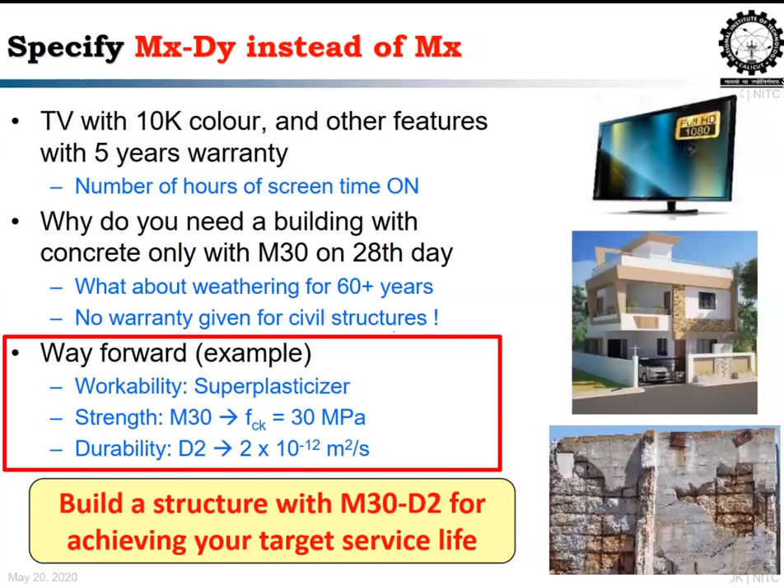And where the problem starts is, though we use quality material, quality testing, all the protocols, at the end it is executed mostly by illiterate laborers, where a lot of errors can happen. In my talk today, I'll be covering the major effects of poor cover, improper curing, improper mix designs. That is the major talk. So why do we need to be very, very serious about this?

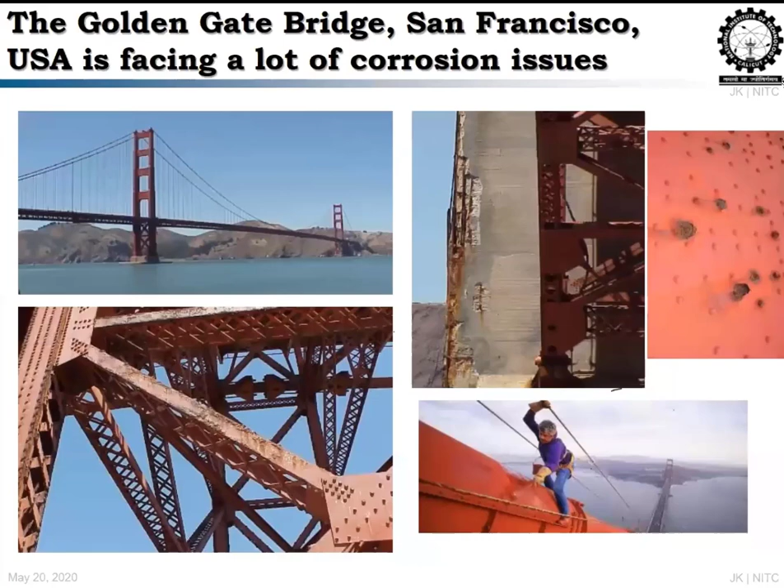For example, this is the Golden Gate Bridge. It's a steel bridge, not concrete, which keeps corroding throughout the year, and there is a team assigned that keeps cleaning throughout the year. They start at one end and finish at the other end by the end of it. This is a steel structure where the steel is exposed and we can see the corrosion. Even in the worst case, you can see where it is heavily corroded and repair it.

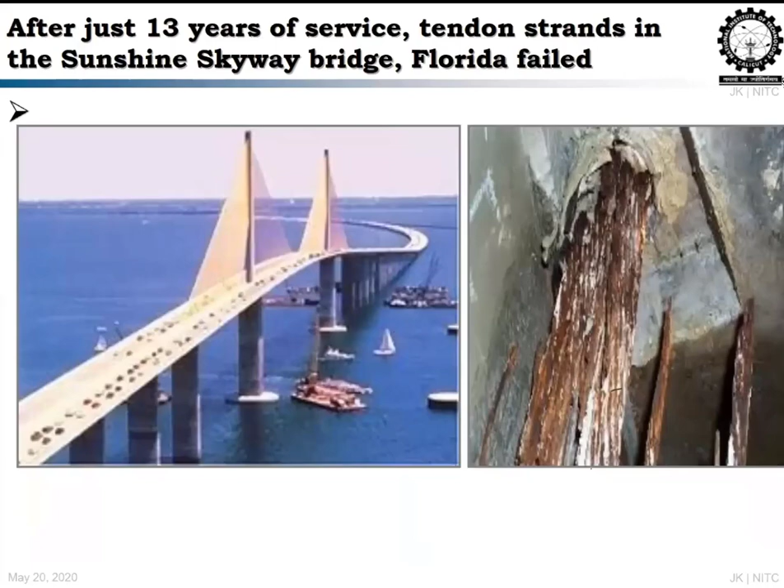The takeaway here is, in concrete buildings the corrosion is happening inside the concrete, which we cannot see. We can only see it through some physical changes that happen in the structure. So we should be very, very careful because we don't have a direct mechanism to capture the problem visibly. So what should be taken care of to ensure durability?

Of course, we have to protect the steel from corroding, because that is the major material that takes the tensile strength of the whole structure. So it's like a bone. If you don't have a bone in your body, you cannot stand straight.

Okay. So, if you have a person who is like a boxer, who is a global champion, but he has a serious cancer, if he will be dying within 2 years, then all his effort, all the trophies that he has won, the championship, everything will go away in 2 years. So like that, we should not leave the structure which you are constructing, which you are investing in.

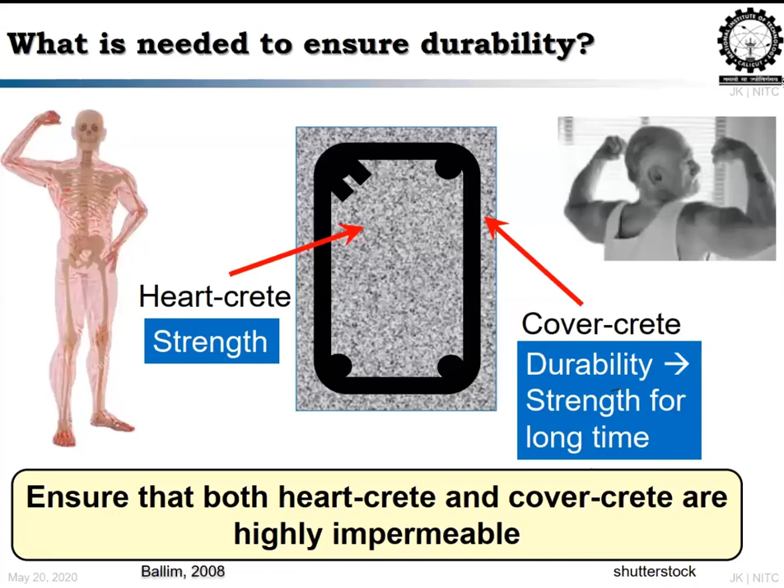So whoever builds a new home, they will have the experience of how curiously they select a material to build it. You will be going to many shops to pick what to put, what color, what kind of concrete. Everything will be picked. So that is the heart-crete which gives strength, but the cover should be protected so that you will have that building for a long time. So you should have a very strong and highly impermeable cover.

How to create it? That is the question. And before that, what are the factors that influence corrosion initiation, so that with our inputs the corrosion can be delayed or avoided? So we have three different parameters which influence it. The third one is the environmental parameter. It means where the building is going to be exposed, whether it is going to be at the seashore, in a city, or in a village. So there, what is the aggressive species that will affect the building? For example, if it is a seashore, it is going to be chloride.

Then the other parameter which we cannot change is the design parameter. That's the second one, where based on the code provisions, we should give the cover depth. Okay, so if it is given as 50 mm, you cannot go for 100 mm cover depth. There are a lot of practical issues. And also we should follow the guidelines for convincing our clients. So what is in our hand is what material we are using to design and execute the building to withstand the exposure condition. That is what is in our hand.

So the material which we use is obviously concrete and steel for making a concrete structure. For the corrosion to initiate, if you see the figure on the right side, there is a black round, that is a steel bar, which has a cover depth, where the red dots are the expected chloride if the building is exposed to the seashore. So slowly the chloride will penetrate and reach the steel to initiate the corrosion. So the movement of chloride to reach the steel is one of the phenomena where your quality of concrete is the influencing parameter. You should make a very good quality concrete.

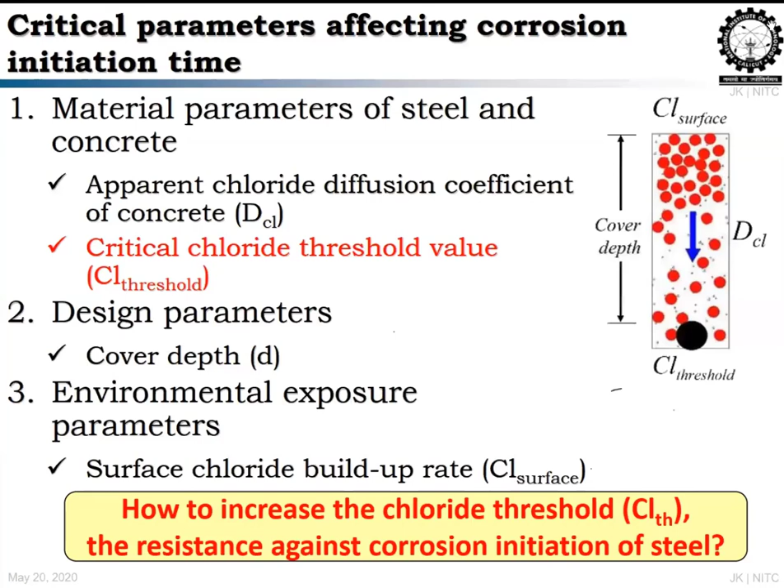Why does the steel corrode? Okay. Usually the concrete is rich in high pH, around 13 to 14, because of the presence of a lot of alkalis. So that is well known, it will have a high pH of 13 to 14. But how will it reduce, or why does the steel corrode? In the high pH, the steel will not corrode, that is well known again. It needs an acidic environment to initiate corrosion. We need at least a pH of less than 10 to initiate corrosion.

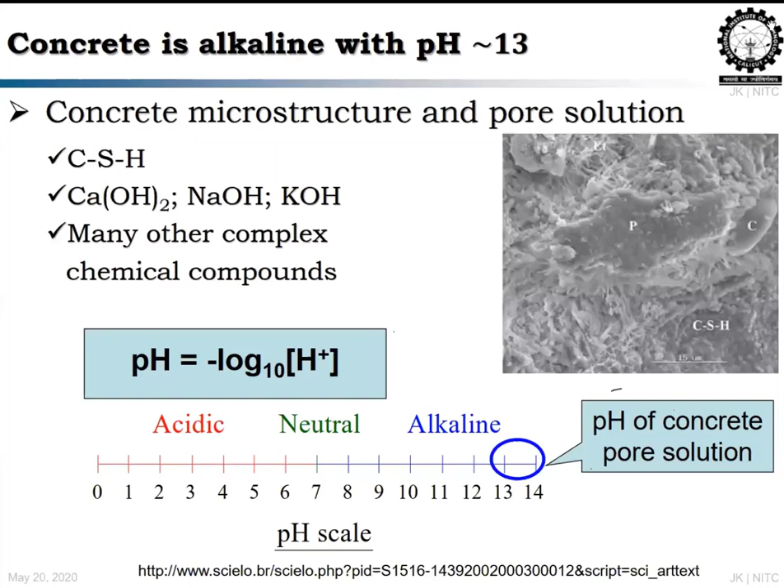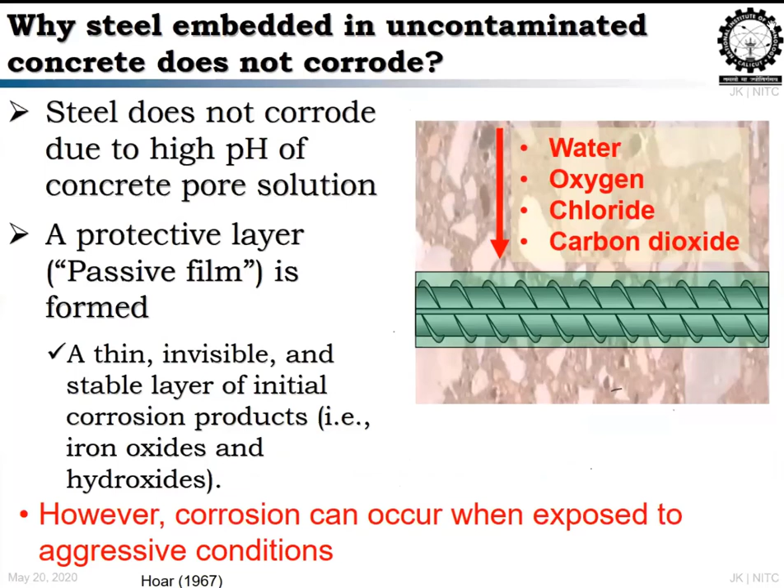Okay. But how is the environment favorable for the steel to corrode? Usually the steel will not corrode at high pH because of the passive layer on the steel surface, because of its formation during manufacturing and also because of the formation of a very thin layer of cementitious material. But how does the corrosion occur? Because of oxidation, which we call rusting, because of the presence of moisture, and beyond that, what are the other reasons?

Because of the chloride penetration and also carbon dioxide, which will collapse your concrete structure and it will create a lot of carbonic acid, which reduces the pH. So these are the major parameters which will initiate corrosion.

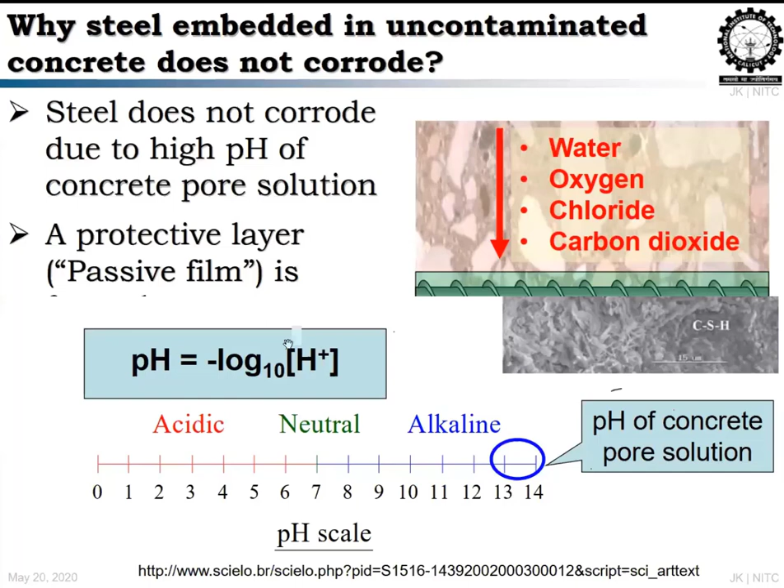So what are the other major corrosion mechanisms that will lead to the initiation of corrosion: freeze-thaw, alkali silica, delayed ettringite formation, sulfate attack, and many more we have in the list. But freeze-thaw in India is very rare, very close to the Himalayas. We have few problems, but it's not a major problem in India.

And we have very good aggregates where we don't have alkali-based aggregates, so we don't expect much alkali silica reaction. Okay, and delayed ettringite formation is a very rare case to happen. Most of the time our climate condition is not so favorable for it.

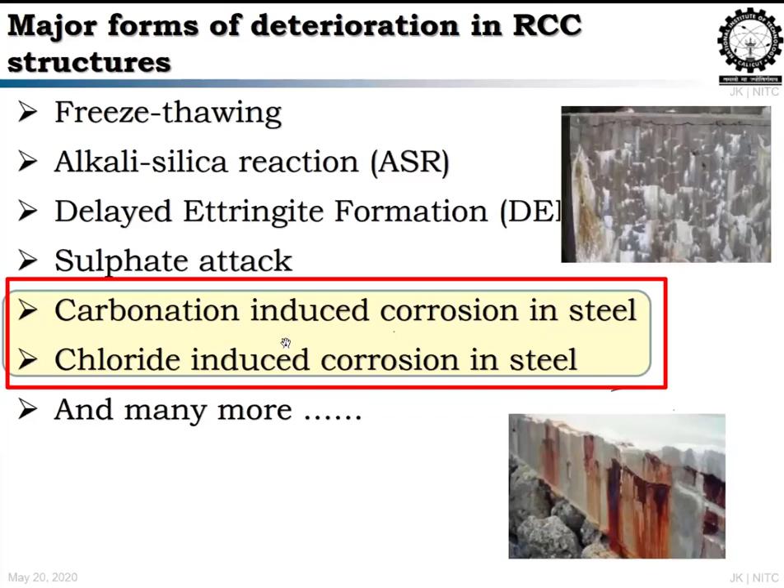Sulfate attack, obviously we don't have because of the very high quality cements that most of the companies are manufacturing, and also our soil conditions and water, whatever we are using, don't have much sulfate. The influencing parameters are chloride and carbonation, which are mainly from sources outside of the concrete, the external forces that create the corrosion. So these are the main two parameters.

What are the possibilities of this? Why do we have to put this as the main focus of the topic? Okay. So as we define the globe, which has three parts of water to one part of land. In India, it's almost three sides coastal, and the coastal zones have major cities, you can see Calcutta, Hyderabad, Chennai, Bangalore, Mumbai, even Pune, or most of the cities.

Most of the cities are near the seashore, where most of the buildings are exposed to quantities of pollution. Obviously, where you have very high traffic, you are expecting a lot of carbon dioxide in the air, which leads to carbonation. So it means India will be experiencing this, and a lot of studies have already been done saying that it should be taken as a very serious issue, so that you upcoming engineers should consider all these parameters I am discussing now and incorporate them in your future specifications.

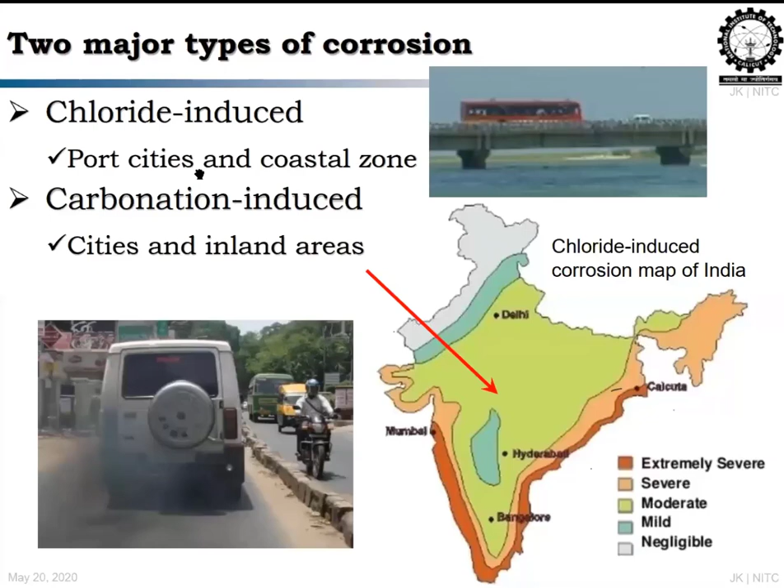And talking about specifications, we have a guideline from IS 456 which defines the exposure conditions: mild, moderate, severe, very severe, extreme. So mild, we know, doesn't have any weather issues associated with it. But severe means the concrete is completely immersed in seawater. And an extremely severe environment means the structure is exposed to very aggressive soils and chemicals.

But it doesn't tell how the deterioration mechanism works in a particular environment, and they didn't very clearly define what sort of changes should be made based on the deterioration mechanism expected in different environments. That is missing. That is what we should be very careful about. We cannot consider severe the same for all the cases.

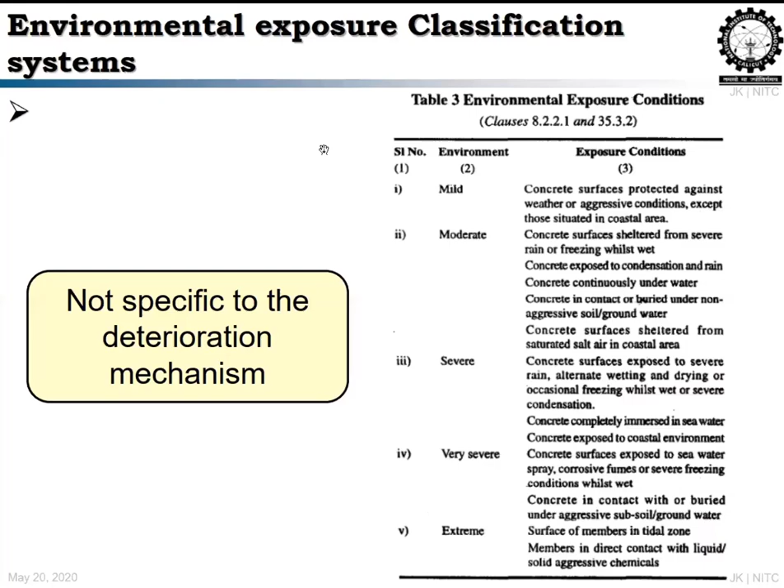Here they have given severe for concrete which is exposed to severe rain, alternate wetting and drying cycles, occasional freezing, and severe condensation. But there are many other parameters which will make the situation very severe. So we should change all those recommendations given in the codal provision.

If that is the case, how do we test carbonation and chloride, so that we can find where we are, whether the building we have is seriously affected or not? That we have to find. For that, whatever building you want to test, take a core of it and do a phenolphthalein indicator test, which you have done in your school days. It will tell you the depth of carbonation.

If the concrete is good quality, it will be very pink. Pink means it is good, like a pink baby, which is innocent. If it is colorless, that means it is carbonated. But the question is how the carbonation happens. That is the biggest question. We have a lot of carbon dioxide because of industrialization, heavy traffic, and many other parameters.

So what this carbon dioxide does is get into the pores of the concrete, and if moisture is present, it will create messy solid particles by reacting with calcium hydroxide or CSH, which is the strength-giving structure, and it will form carbonic acid, reduce the pH, and also form calcium carbonate.

Because of that, the CSH structure will collapse, and it will allow all other aggressive parameters to move. This is one serious issue.

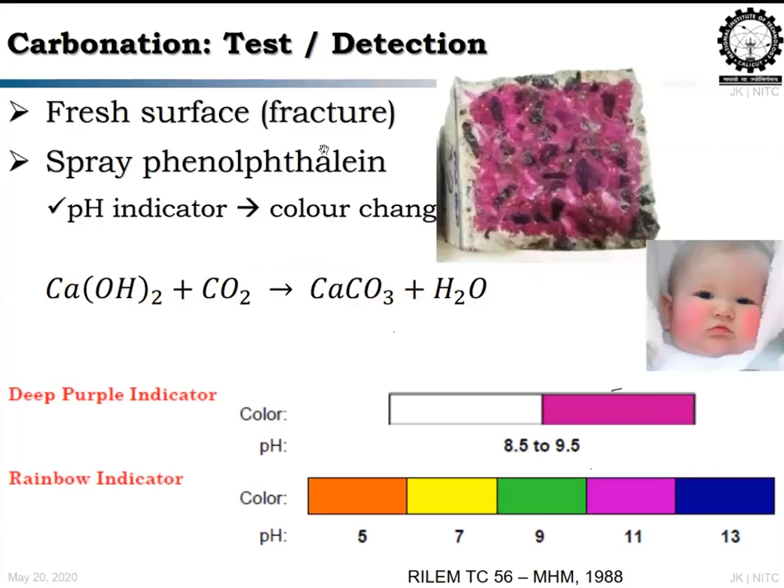If you are looking into corrosion of steel, there are different mechanisms. One is rusting, which is because of presence of oxygen and moisture, and the other one is chloride induced. With presence of oxygen and moisture, corrosion takes place as we see everywhere. We can see the rust on the steel, where it will form an anode and a cathode in the same steel bar, and it will take the moisture and water and form ferric oxide hydroxide. This is a very common reaction, and it creates a very uniform corrosion.

So the corrosion will happen throughout the steel structure, meaning throughout the steel bar. So loss of metal that happens throughout the length of the structure will be comparatively less. I'm not saying we don't need to bother, it's comparatively less.

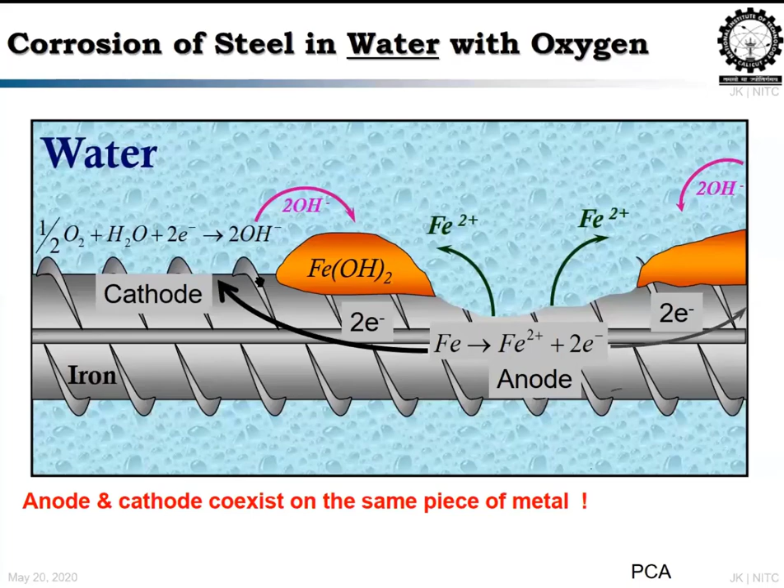Where we should be very serious is the chloride induced corrosion. Why? Because whatever Fe2 plus ions come out of corrosion, it will react with the chloride present near the steel surface, forming ferrous chloride, and that ferric chloride will react with the moisture and form ferrous hydroxide, the same compound formed in rusting.

In addition to that, it will form HCl, which we know is hydrochloric acid. Obviously, that acid will reduce the pH. Then, what is the major issue?

This HCl further, because of the reaction, will break into hydrogen ion causing hydrogen embrittlement, and again the chloride will be there. Again the same chloride will react with Fe2 plus ions and form ferrous chloride. This cycle keeps continuing throughout the life of a structure once corrosion is initiated. So we call it a regenerating process. We should be very careful about this chloride induced corrosion.

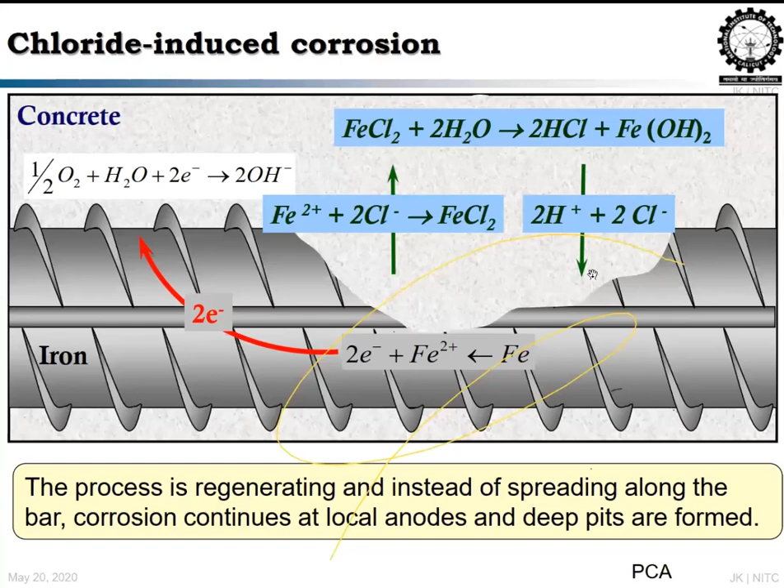It completely reduces the cross-sectional area of the steel, which cannot be detected by most of the NDT machines, whichever you use for finding cover depth, rebar locator, or profometer. Many instruments are available to see the diameter, depth of cover, everything, but they cannot capture this type of corrosion.

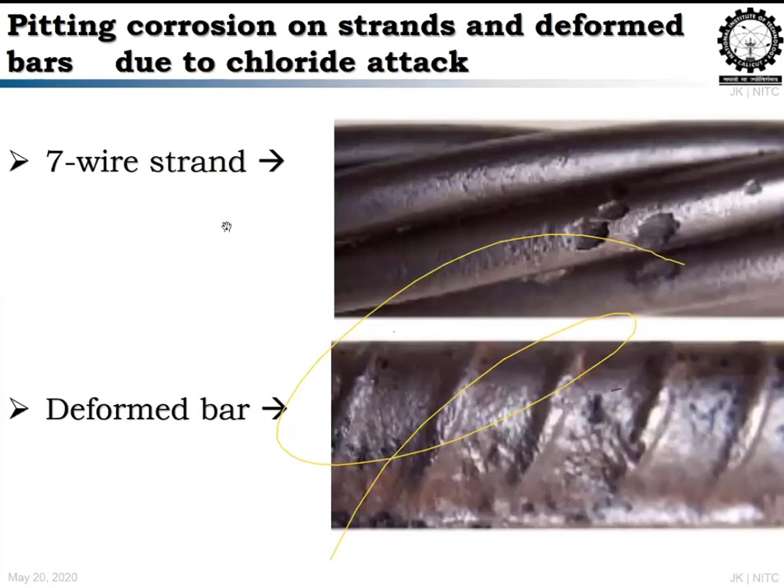You will think the building is of very good quality, but all of a sudden the building will collapse, which is catastrophic. You cannot realize how it happened. You will only see the corrosion after it collapses. So this is serious. And what happens if the corrosion happens?

Obviously it is going to increase its volume because it keeps oxidizing. It will form ferric hydroxide, and if you form Fe, it will form Fe2O3, and it keeps increasing its volume because of oxidation, which exerts a lot of tensile pressure on the concrete and induces a crack from inside.

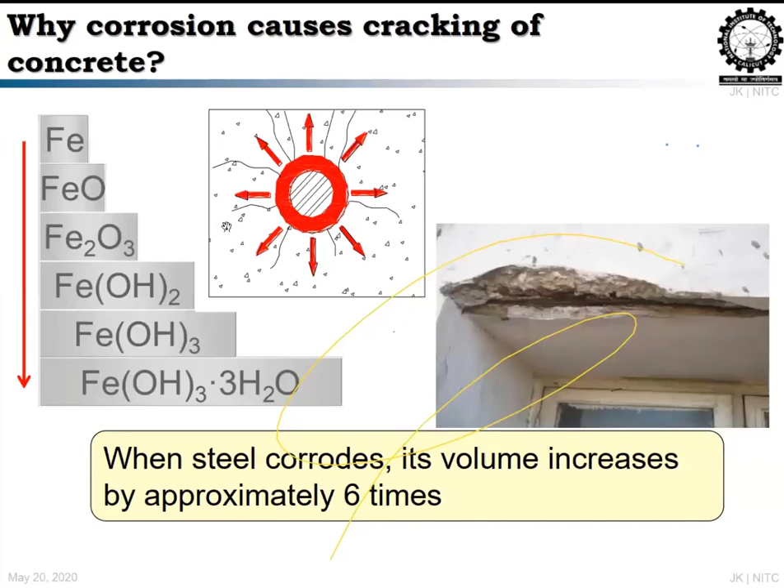We know concrete is always weak in tension, and the crack starts in a circumferential way because of the steel rust expansion, and that induces fine cracks, and all those fine cracks accumulate, allowing aggressive species to reach the steel. So again, we are inviting danger. That is the problem of allowing corrosion to happen.

How to choose the steel? Again, we are using TMT steel bars nowadays. But we know the steel bars have a microstructure of inner and outer regions, which we call pearlite and martensite.

The outer periphery area is of hardened metal, brought into structure because of quenching, which is part of the manufacturing process. That is a very hard one, and the inner part of the steel is a soft one—not exactly soft, but comparatively soft—which is more ductile, and that will be helpful for earthquake resistance and such. So we get a very good advantage.

Most manufacturers who supply steel don't completely form these two distinct layers because of an improper quenching process. This is something you can test wherever you want, no special equipment needed. You can see it with the naked eye.

All you need is 5% nitric acid added to ethanol. To get a closer view, I used a microscope. I'll show a video comparing how poor quality steel looks versus good quality steel. It's a very easy experiment anyone can do. I'll start by playing a video of bad quality steel.

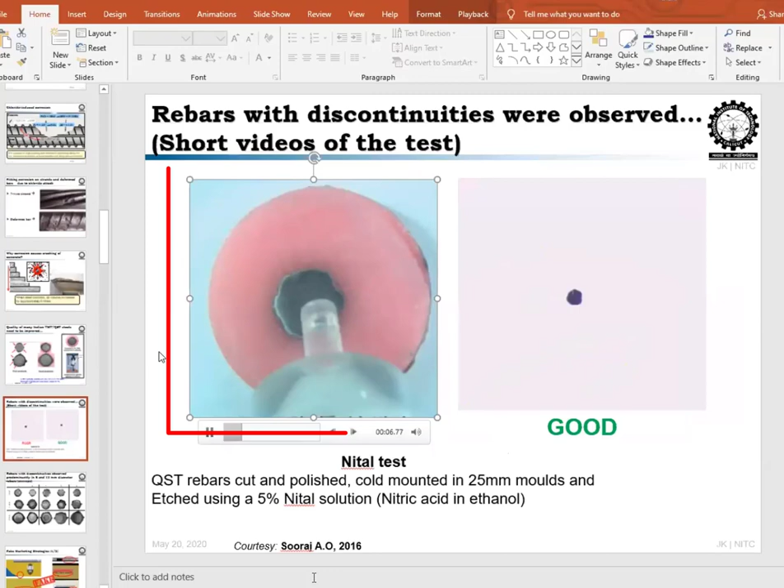The steel is polished well and exposed to the 5% Nital solution. As it reacts with the acid, you can see how an outer ring forms, showing a dark formation at the periphery of the steel bar. You can see it is not uniform all around the bar, meaning the quenching is not proper.

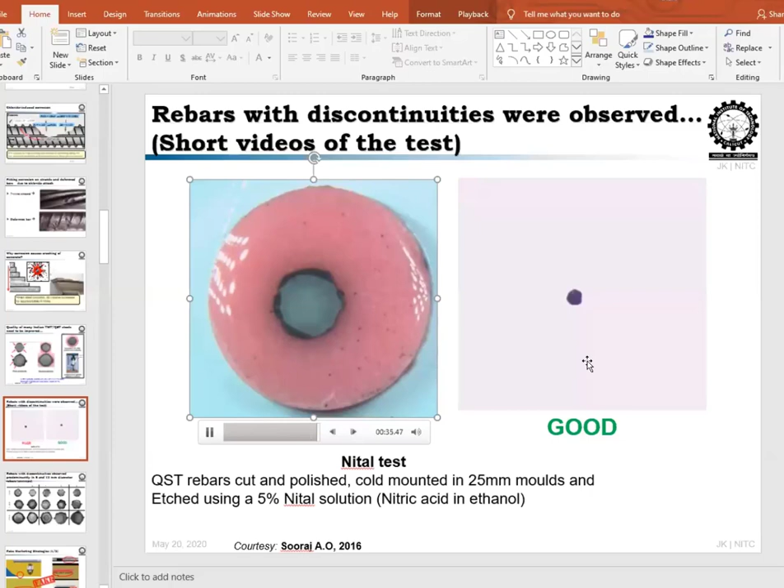Now let's see how good steel behaves. I'm playing this video for good quality steel, using the same process to assess the TMT bar quality, where the same solution is placed to see how the outer ring forms.

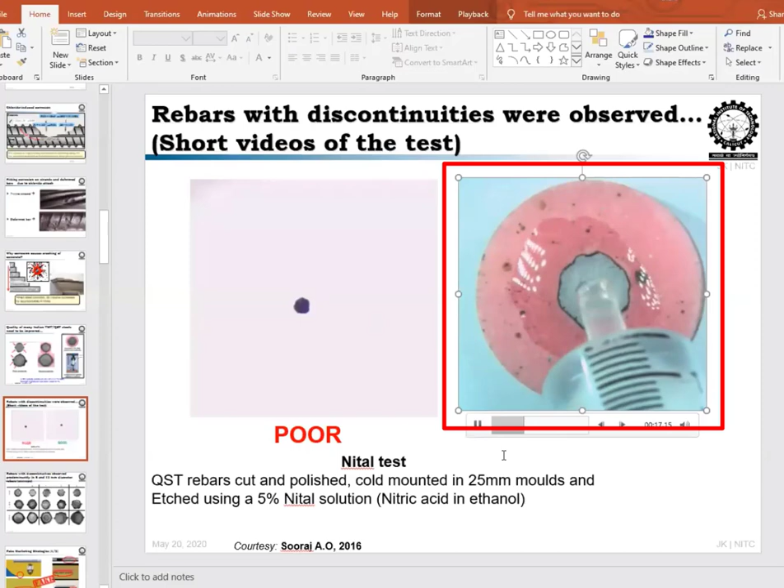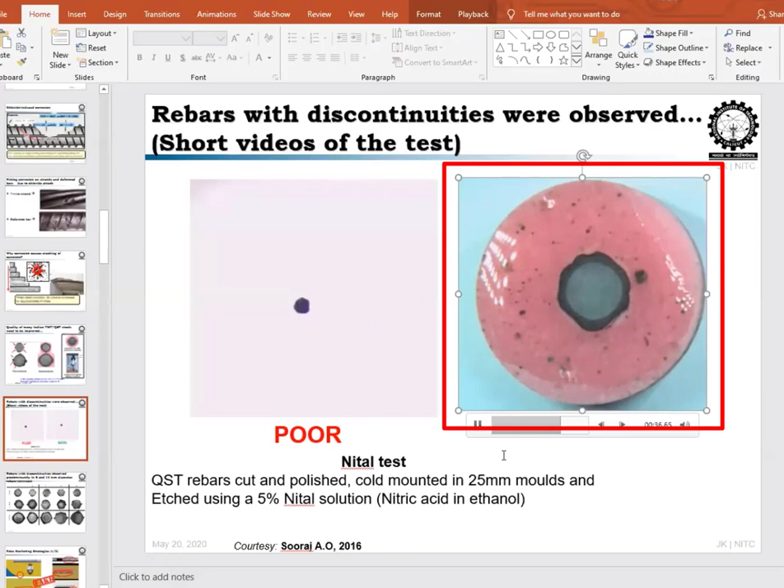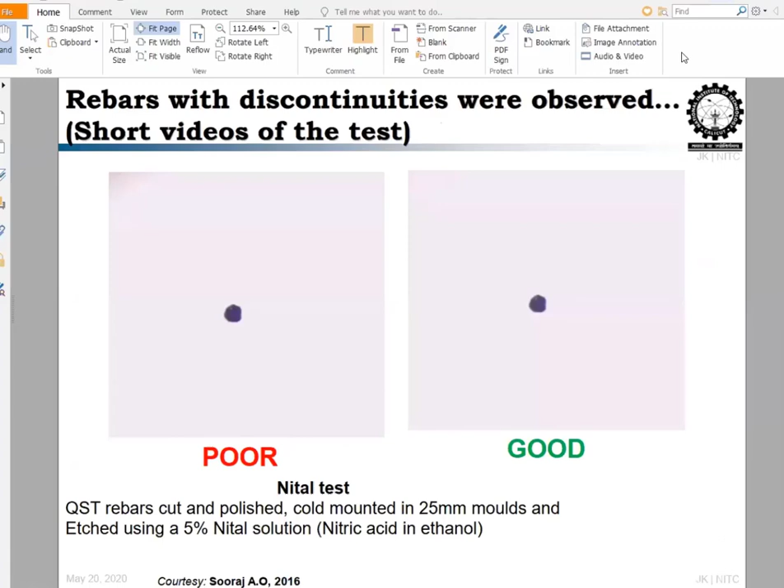You can see it forming, getting darker, very dark now. You can see the dark periphery at the end, and it is very uniform. If you compare both, it is very clear which is bad quality and which is good quality, as shown in this presentation.

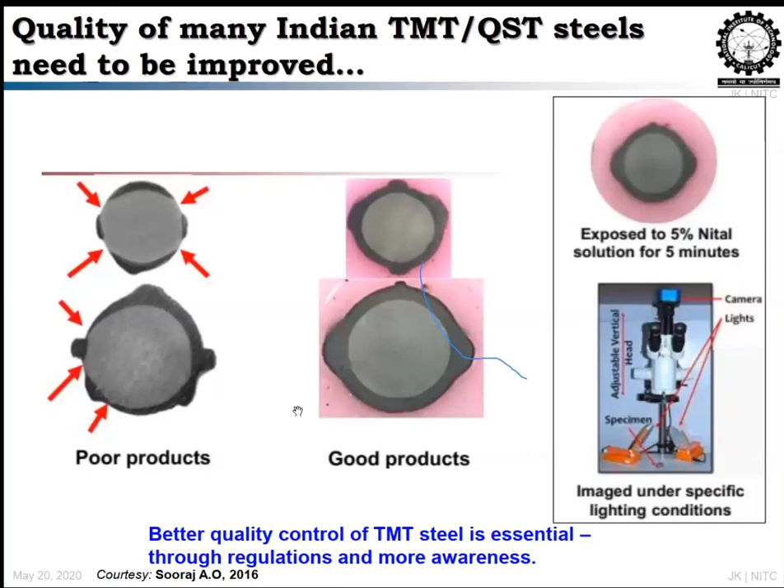The problem is, if there are two different steel compositions, it leads to dissimilar metal corrosion. You might have seen this at home with galvanized screws and nuts bolted into alloy plates, where the galvanized steel corrodes at the junction with the nuts due to dissimilar metal corrosion. The same thing happens in your structure, and dissimilar corrosion is faster than usual corrosion.

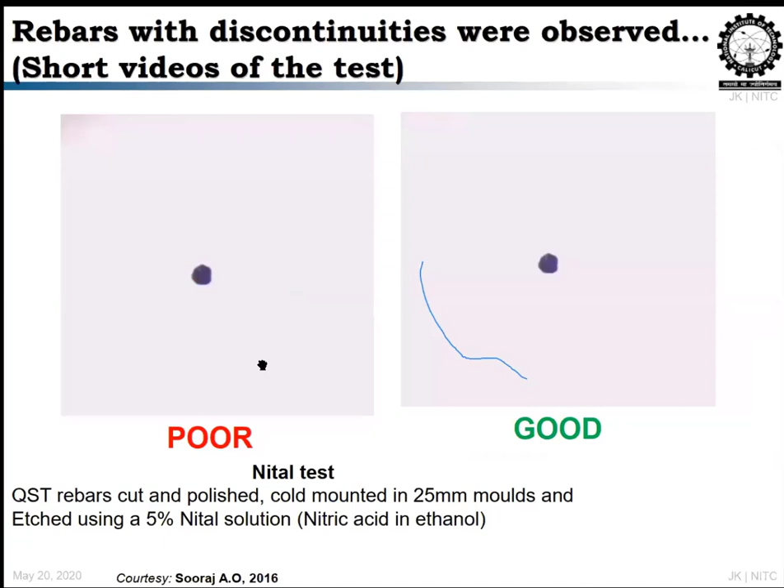This figure shows tests with many steel bars from different manufacturers and sizes: 8mm, 12mm, and 16mm. With larger diameter bars, the ring formation is very good. But with 8mm bars, in most cases there is no proper formation of the periphery, meaning there is no proper ring formation due to quenching.

What we need to take away is that in concrete, we consider the cover depth from the center of the main bar. What's projected outside is the stirrups, mostly 6mm or 8mm bars, which don't have proper formation of this ring. This means the stirrups are the main element that will get corroded.

If the stirrups get corroded, you will lose shear strength or face buckling. Buckling can happen in columns and beams where stirrups are lost, exposing you to shear failure or deflection at the beams. This is a very serious issue that we have to take care of.

While buying steel, or even as steel manufacturers, you should ensure you are supplying or buying very good quality. Another issue to look for is that many companies use marketing strategies to sell their product with catchy names, like 500 TMT bars or TMX 500 T bars. Most of the time, this 500 doesn't mean it is FE 500 like FE 400 - it's just a brand name, similar to i3, i5, i7 for computer processors. It's another model name used to catch customers.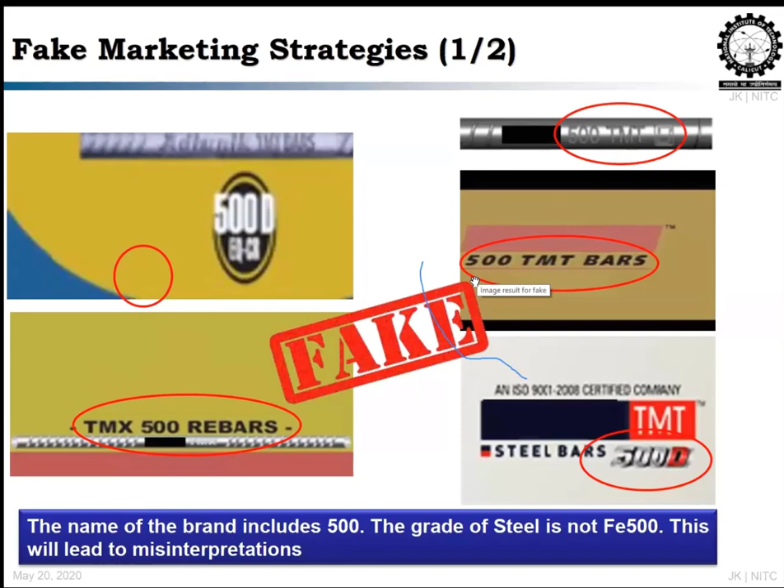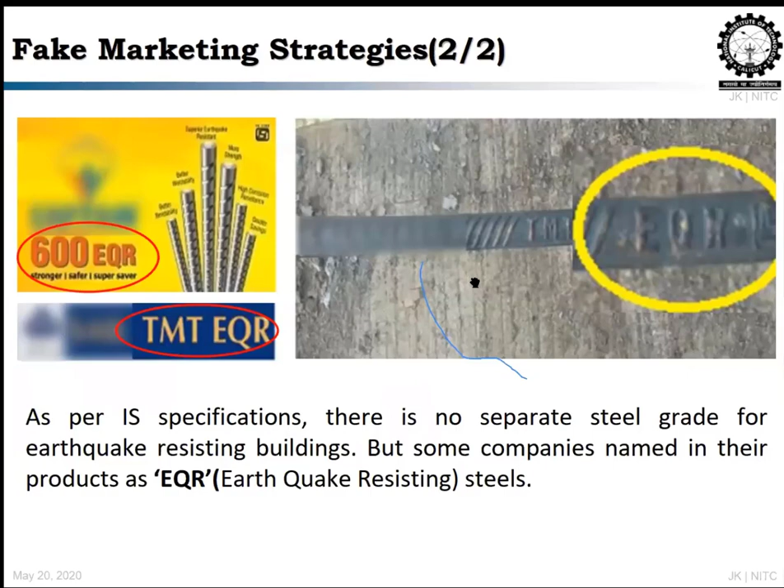You should be very careful. Some companies are selling EQR earthquake resistant steels, but there is no proper codal provision to define what earthquake resistant means, or a specification given for it. Many companies, with their own brand names, put labels like EQR 600 or 500 just to market their product. It doesn't really mean the steel is earthquake resistant, because earthquake resistance depends on the whole structure, not just the material, the design, how much steel is used, and many other parameters. So we should not run behind these catchy words. We should be aware, and also check that there is proper ISI certification on the board.

While buying material, always look for proper IS standardization, and make sure you have the genuine ISI license number. These are very important things to be keen about, because with the same grade like 500 or 600, everybody will start selling the same product name. That is very dangerous. You should not become a victim of that.

Even if you are buying good quality steel, how you store it is a major issue. IS 4082 gives clear recommendations on how to stack construction materials, not just steel but all materials and components. So here I'm listing how steel should be stored and how it is often stored nowadays.

Also try to keep the steel in a covered or closed environment, like a warehouse. That is the suggestion given by the Indian standard, and we should try following it. So these are about how to get steel and how to store it.

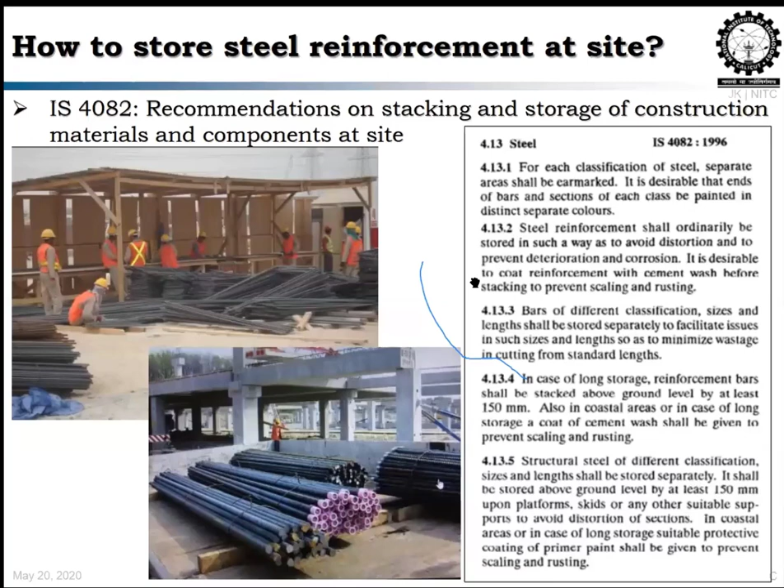But how do we stop corrosion? What parameters should we be thinking of? As I mentioned, if the quality of concrete is very bad, the aggressive ions will reach the steel and initiate corrosion. The level up to which steel resists corrosion is called the chloride threshold. That is the main parameter we have to determine.

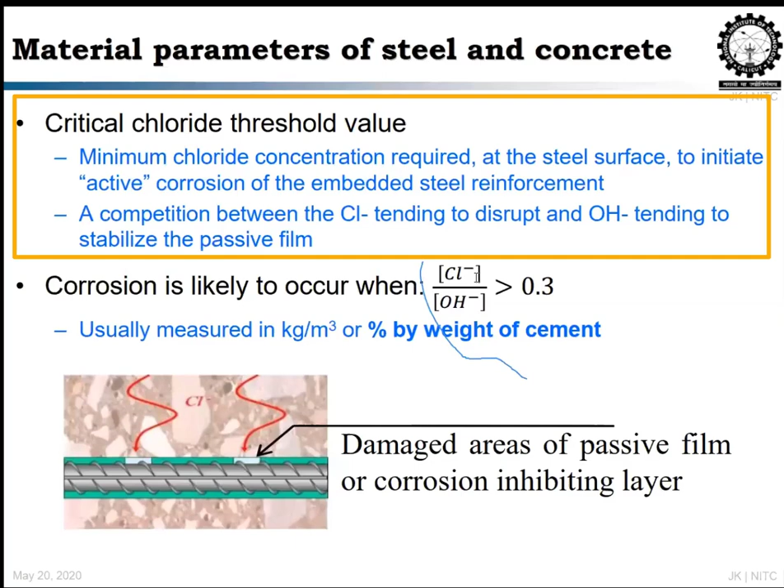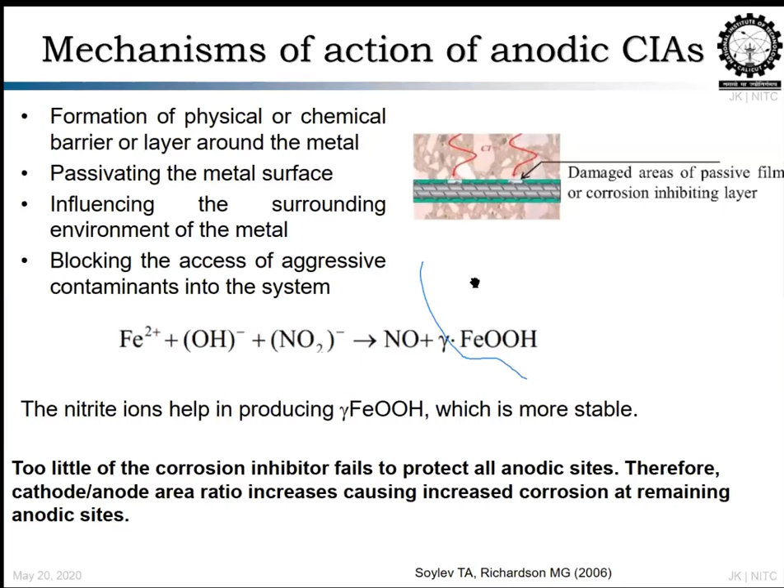So how can we increase resistance against corrosion? There are many technologies, like making good quality concrete. But I want to touch on a different area: using corrosion inhibitors, which form a very dense passive layer so the steel won't corrode. Even if the quality of concrete is not good, or you have restrictions getting materials or quality issues, using inhibitors will help you get good quality concrete performance.

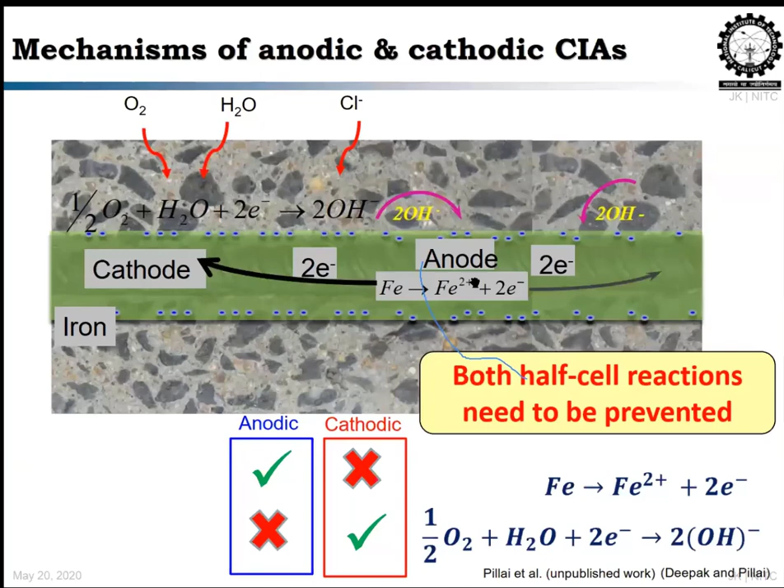There are different inhibitors available in the market. We call them anodic inhibitor, cathodic inhibitor, and the combination of both is called bipolar or mixed inhibitor. The anodic and cathodic inhibitors inhibit corrosion only at one end, either the cathode or anode, but reactions still happen at both points, tending to reach equilibrium for corrosion to occur. So these are not advised, though anodic inhibitors are still commonly used. What is advised is going for a bipolar inhibitor, available in the market nowadays, which inhibits at both anode and cathode through its different mechanism.

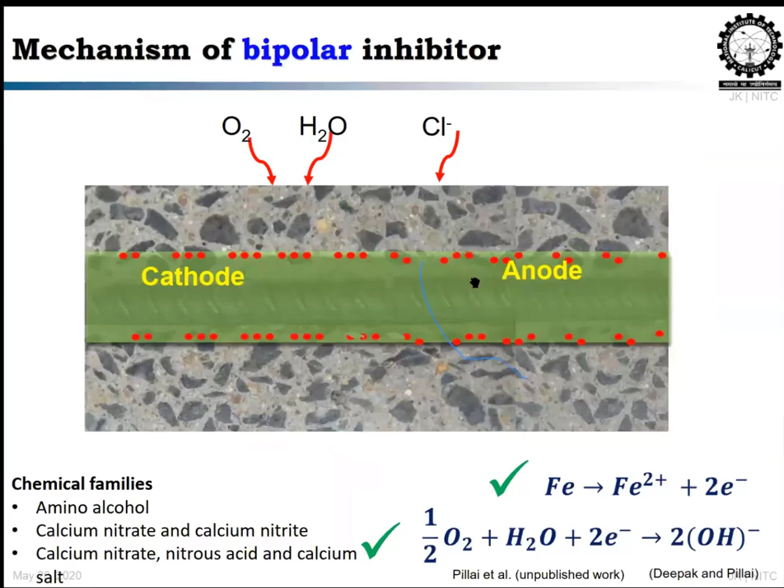I don't want to get too much into the inhibitors, but compared to anodic or cathodic inhibitors, these bipolar inhibitors are the best. We have results, and I will show you those, so you can realize how much better they are compared to the traditional methods.

We have test protocols and methods to test corrosion initiation and corrosion propagation with different mix proportions, different chloride levels, and different water cement ratios. Whatever parameter you are going to change at your site, we can recreate the same environment and test which environment is better, which inhibitor is better, or even if you are trying different steels from different manufacturers, we can find which manufacturer's steel is better for your requirement.

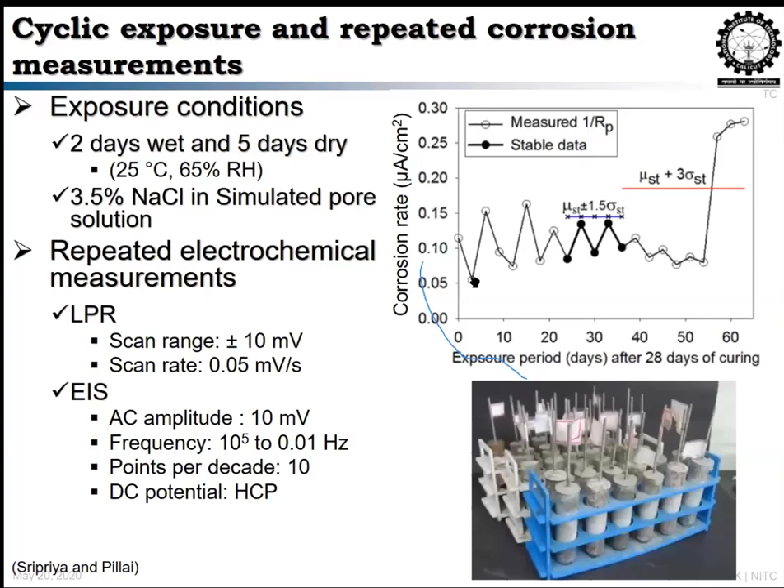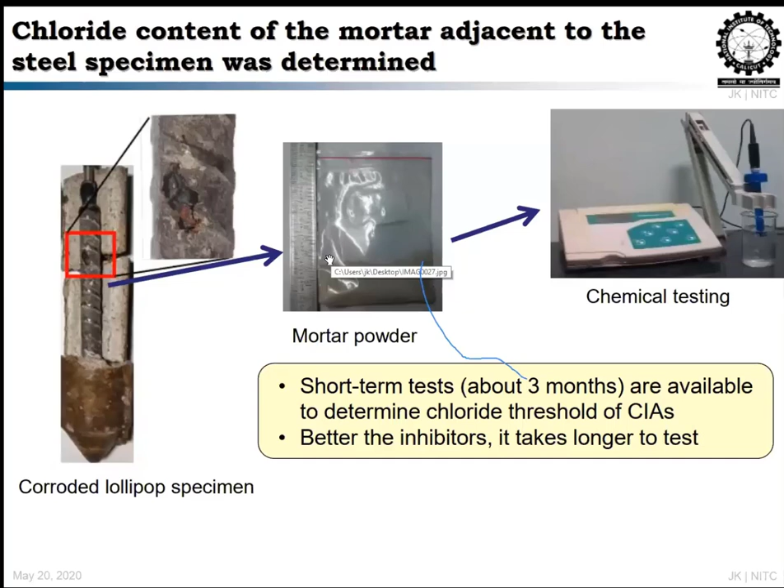So all those things you can find with the test procedure which is available. So here what we do is we will be exactly finding how much chloride is required at the steel surface. If you consider this specimen at the left corner, marked as a red box, where the corrosion has occurred, we will be collecting the mortar specimen and finding the chloride concentration. Okay. By this we will find what happened at the steel surface, which exactly replicates what will happen in your real structure. So that is the purpose of this testing.

So with that you can see I have compared the chloride resistance or threshold value between the cementitious system which doesn't have an inhibitor and which has a bipolar inhibitor. Without the inhibitor, the threshold value is around 1% by weight of cement. If you're going for bipolar, it is around 2% by weight. If you're going for an anodic inhibitor, it will be around 1. Means by using this bipolar inhibitor, you are getting double the corrosion resistance. That's what it means. Okay.

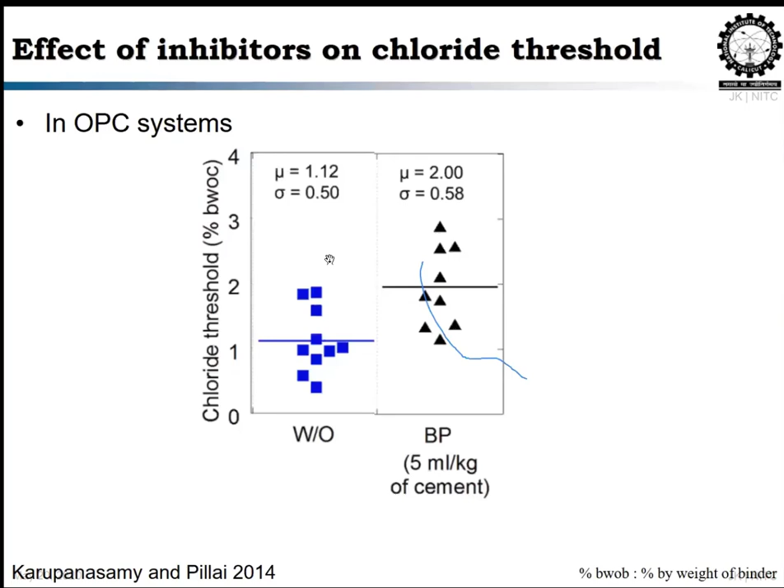So here you can see the chloride threshold level, which varies with the increase in the dosage of corrosion inhibitor. Okay. We have tried with OPC and PPC, where OPC doesn't have any inhibitor, and PPC we tried with 0%, 0.5 and 1% of inhibitor. And you can see with the increase in the dosage, you can increase the threshold. So that is one of the major advantages.

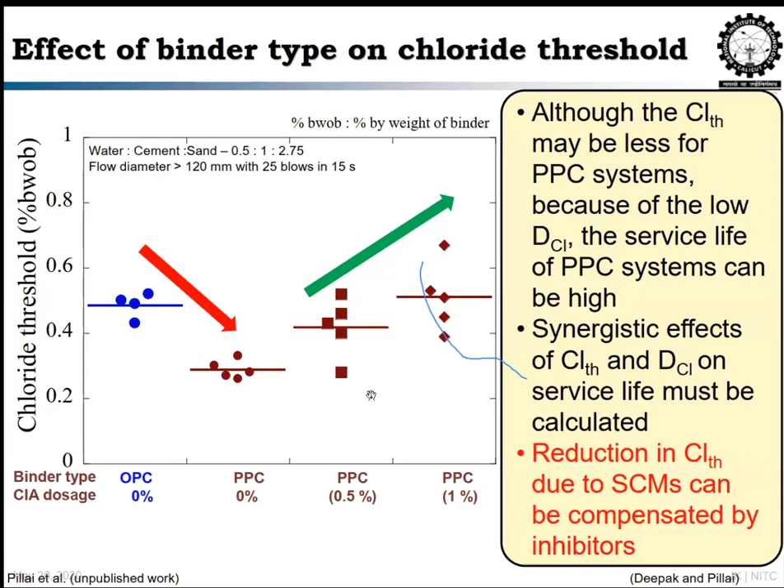So obviously we have to find what is the optimal dosage that is required against steel corrosion. That is very important. And we have to see what sort of PPC we have to use. That is also influencing. And also the water cement ratio plays a very important role in increasing the threshold level if you are going for bipolar inhibitors.

For example, we tried with 0.4 water cement ratio and 0.6 water cement ratio. With 0.4 we tried different dosages of inhibitor, 0, 0.5 and 1%, and with 0.6 we tried 0 and 1%. With 0.4 water cement ratio, with the increase in dosage, you can see the increase in the threshold level. But with the water cement ratio of 0.6, with the increase in dosage, you couldn't get the expected threshold level. Why? Because these admixtures are diluted and lose their efficiency. Okay, so that is the major problem.

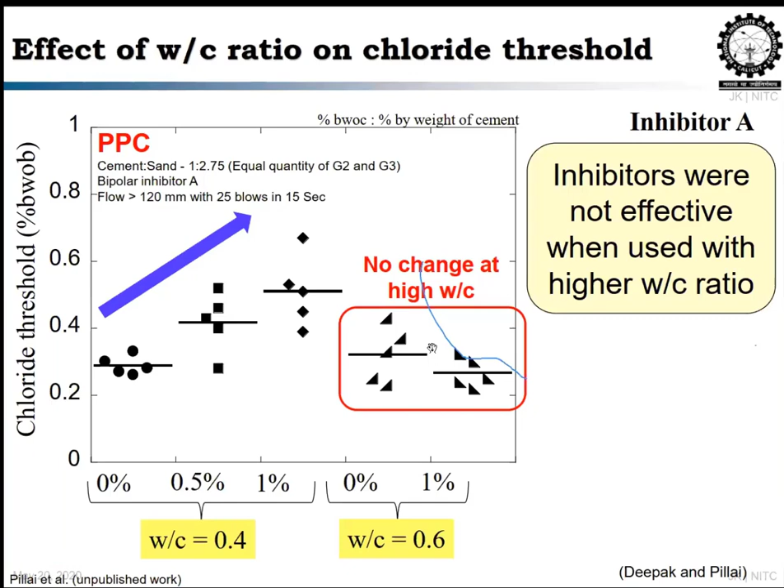So it is always recommended to go below 0.5 water cement ratio if you are using any inhibitor, not only bipolar or anodic inhibitors, any inhibitor. It's always better to go with 0.5 water cement ratio, and you can get your slump with your plasticizers. You can play with that. And compressive strength is also affected, not only the threshold level, if you are not properly choosing your dosage.

Okay? So here it is a bipolar inhibitor, where the manufacturer has given a recommended dosage for a particular cement content, which we have followed, mentioned as RD, the recommended dose. The boxes on the left of RD are dosages less than recommended, -20 and -40, and those on the right are +20 and +40 of the recommended. With no inhibitor, at the left end, the strength is around 35 to 40, and with the recommended dosage we again get almost similar strength. But if you reduce or increase the dosage, you get less strength. So choosing a dosage to achieve appropriate strength and durability is the concern.

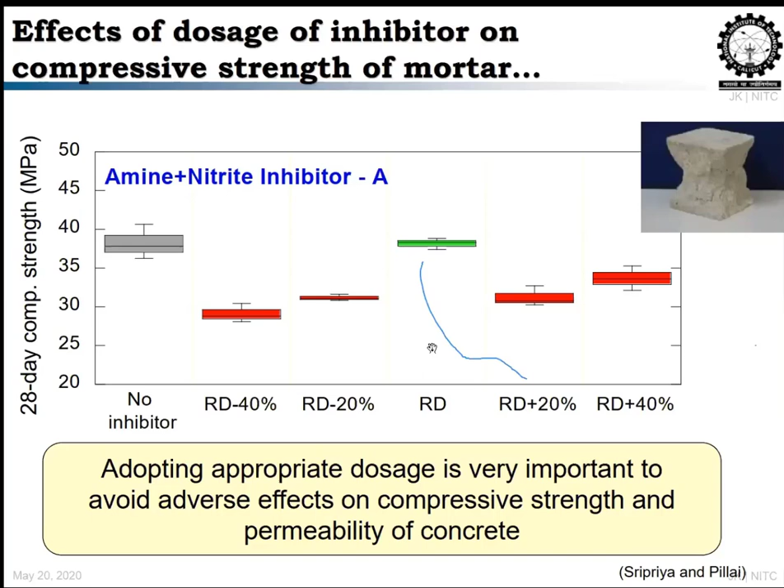Okay. So why is this happening? Because of not properly maintaining the water cement ratio. So again it creates a problem and it leads to permeability. So dosage is also an important parameter.

Another problem that we face is how to find whether the inhibitor was used by the builder while making the concrete. For example, if you use a superplasticizer, the performance will be seen immediately while concreting. But the performance of the inhibitor you will see only after a few decades, after 20 years, which is not at all visible. Okay, so we don't have proper techniques.

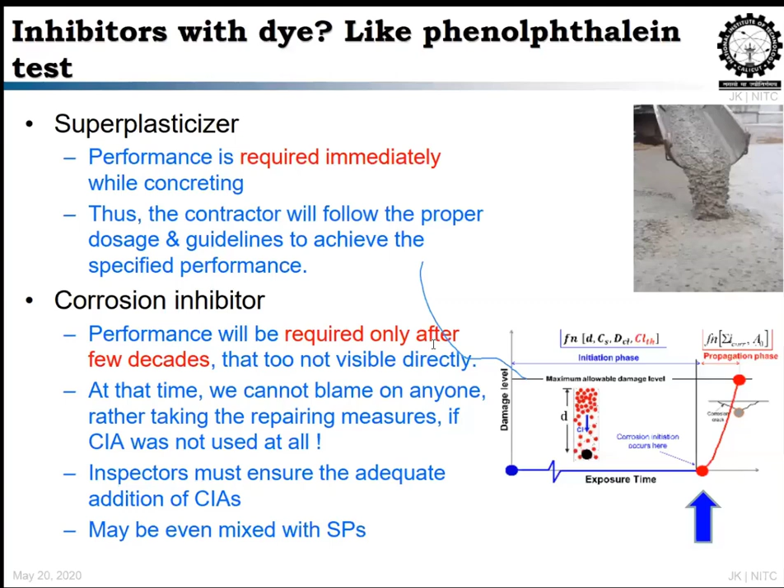So those who are researchers or enthusiasts who like to work on chemistry or non-destructive techniques, we are expecting some test method like how we do for carbonation, where just by simply spraying you will know the depth of carbonation. Just by spraying on the concrete, maybe chipped off or patched, if you can get some color when you have a corrosion inhibitor. This is a question for the participants, so you can look into it. This is the open option which is given. It's like a challenge for us.

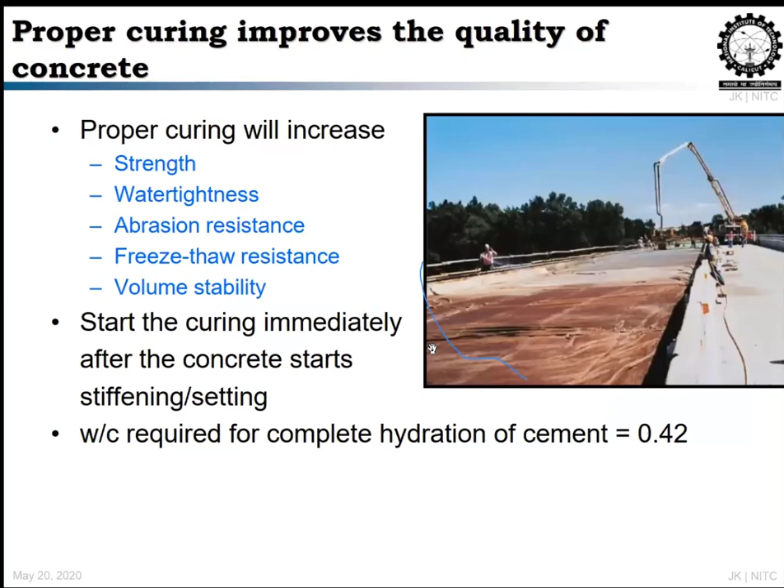And even if you have good quality concrete and concreting is done, curing is very important. Obviously it will give strength, water tightness, abrasion and freeze-thaw resistance, and volume stability. But how long we have to cure, and how to see the influence of proper curing? So you see a graph which shows the compressive strength with respect to age. There we have taken 4 cases, where the light brown color is the case cured at the laboratory, not with water, only with air. We didn't expose it to any ponding or moist curing.

The second case, in green, is 7-day moist cured, as we do, or ponding, and then exposed to air for 1 year. The third case, in red, is cured for 28 days and exposed to air for 1 year. And the fourth case, the dark blue line, is moist cured throughout the entire time of exposure. So here, the case where it is not properly cured, meaning air cured, gives less than 30 MPa at 90 days, which looks similar to the 28th day. There is not much difference.

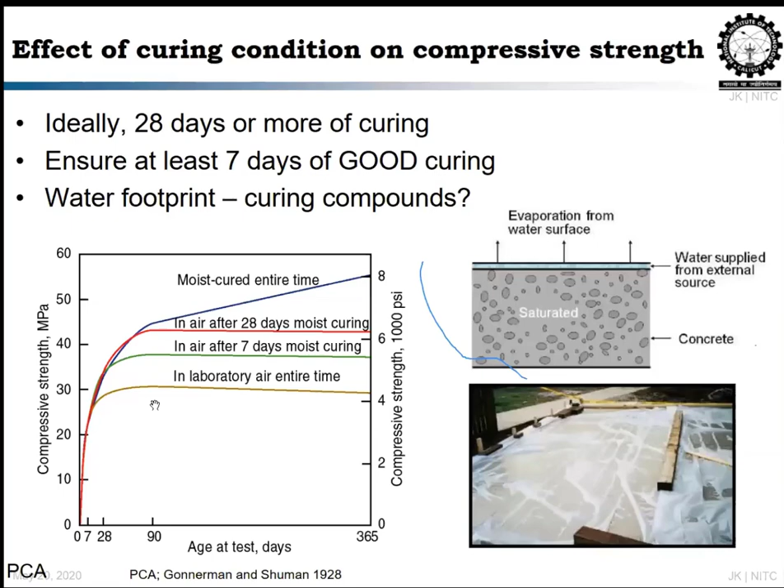But if you see the variation in strength after almost 60 days, you can see a major difference in the strength. So what is emphasized is at least cure for 7 days, and if you are using any secondary cementitious materials or fly ash, make sure you cure for 28 days or more if possible, so that you get a very high strength, rather than putting a lot of OPC thinking that OPC will give you strength. It will give you strength obviously, but you can save money just by using fly ash and proper curing. So that is a very important takeaway.

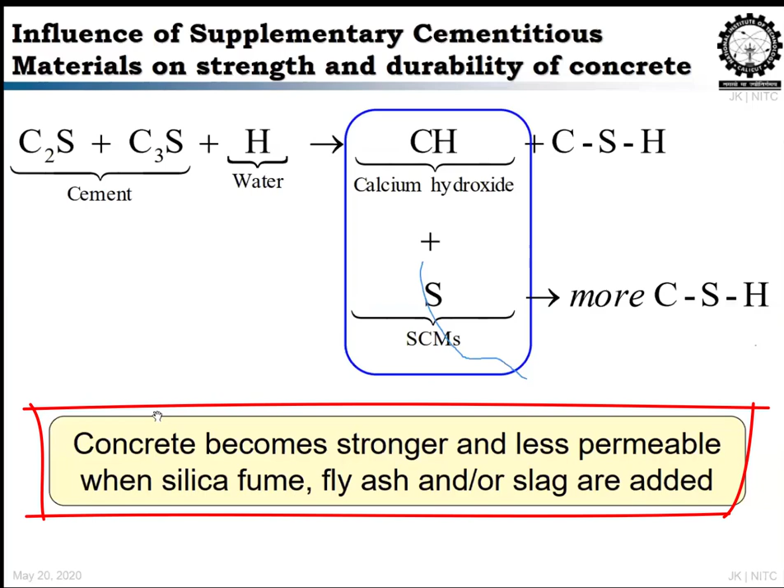And how is this strength achieved just by curing? These secondary cementitious materials, which are rich in silica, take up the free calcium hydroxide in your cementitious system, which forms when cement hydrates by reacting with water, and that forms more CSH. CSH is calcium silicate hydrate, the strength-giving compound which makes the concrete very impermeable. So if you have double the CSH, you get an increase in strength and a very impermeable layer. So secondary cementitious materials like silica fume, slag, and fly ash are recommended. We'll see how it influences your durability.

So here we are looking at the diffusion coefficient of concrete with different water-cement ratios. Just by making proper proportioning based on the water-cement ratio, you can achieve a very good reduction in your diffusion coefficient. The diffusion coefficient is the rate at which aggressive agents like chlorides move from the cover to the steel surface, the rate of movement of aggressive ions, simply. So you can see from 0.3 to 0.6, comparing 0.3, 0.4, 0.5, it changes by one order. So it is always recommended to go for a lower water-cement ratio to have a reduced diffusion coefficient. The main parameter is to have a very low water-cement ratio.

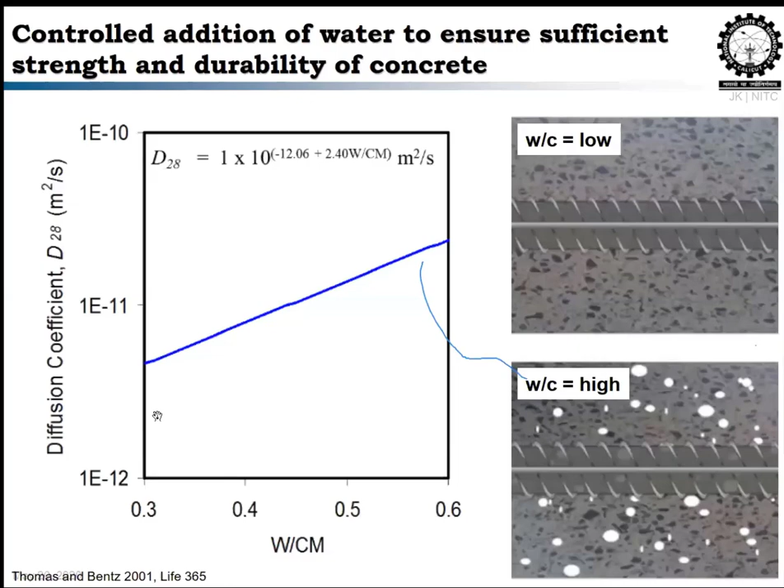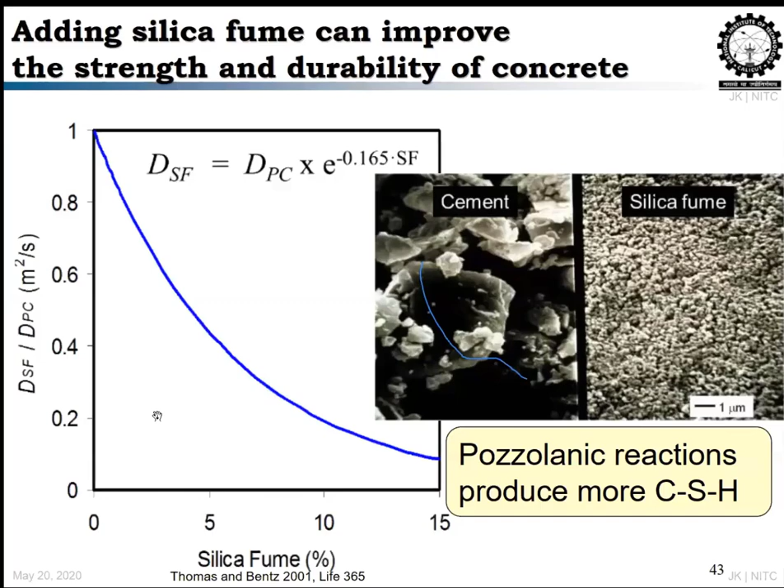And again, let's see the impact of silica fume. Comparing the diffusion coefficient of silica fume concrete with Portland cement concrete, that ratio is given on the y-axis against the percentage of silica fume used. With no silica fume, 0%, we take the ratio as 1. Going to almost 10% is more than enough to reduce your diffusion ratio to 0.2. So that is a major impact you can see just by using silica fume. This is another parameter showing the importance of using secondary cementitious materials. And then the importance of having different.

So you will be having a question, which one I can pick for my requirement. So for that case, this graph shows age in years for the range of 28 days, 1 year, 10 years and 100 years. And it shows the diffusion coefficient, and also you can see it is marked as 28 days, where it is almost 0.1 year, where if you see the diffusion coefficient is almost similar. If you are checking on 28 days of a concrete, it is almost similar.

You will tell that there is no effect of using secondary cementitious material. Why we have to use fly ash, why we have to use slag, or why we have to use some other cementitious material. But if you see, with the increase in age, with 40% use of fly ash, it is changing the diffusion coefficient by almost one order, when comparing to the case which is in blue color, that is the Portland cement, which is nowhere comparable. That's why it is very, very important to use the secondary cementitious material.

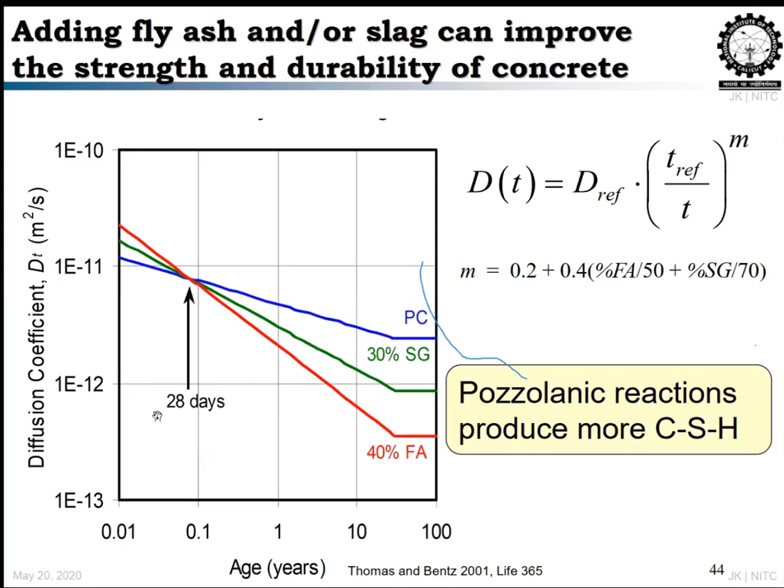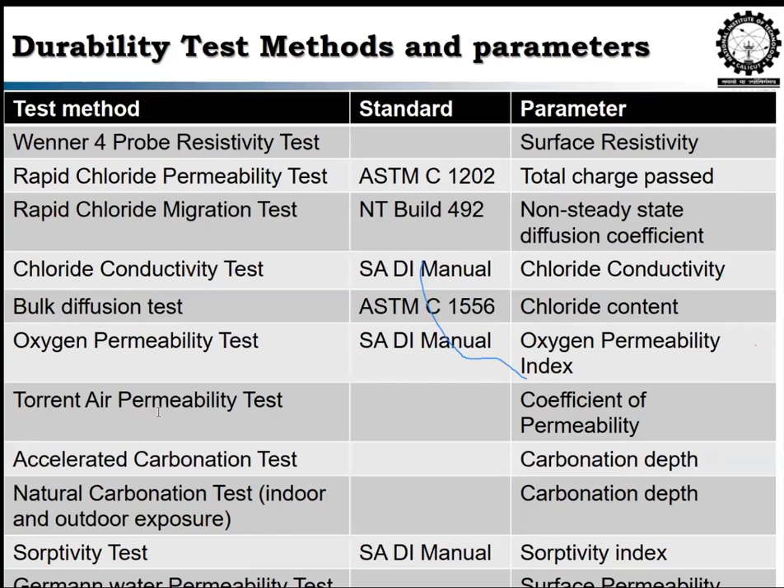And to test this, n number of different types of test methods are available. I'm not getting into all this. Just I'm showing you so that you can take a screenshot of this, or I think it may be recorded so that you can get the video and you can do all the tests to get the different influencing parameters. Just like how I showed for diffusion coefficient, you can find all other influencing parameters which lead the corrosion to happen. And we'll get into the service life part.

We got diffusion coefficient. I'm talking about threshold level. So how to use it, how we can find, if I know this number, how many years my structure will perform. That is the main content of today's talk. So here, as I told, as the time goes on with the increase in the exposure time, the chloride ions, which are shown in red color, will move towards the steel bar, which is shown as a black circle, and it will initiate the corrosion. So that phase is called the initiation phase of a service life.

Once the corrosion is initiated, it will start propagating. It means the corrosion will happen, and you can see the rust stains and the cracks that appear on the concrete. So our main objective is to stop the corrosion initiation. That is the easiest way, rather than initiating, corroding, and then stopping in the propagation. It will take a lot of money from your pocket to repair. So we estimate this initiation phase with the durability parameters that we have seen, using threshold and diffusion coefficient.

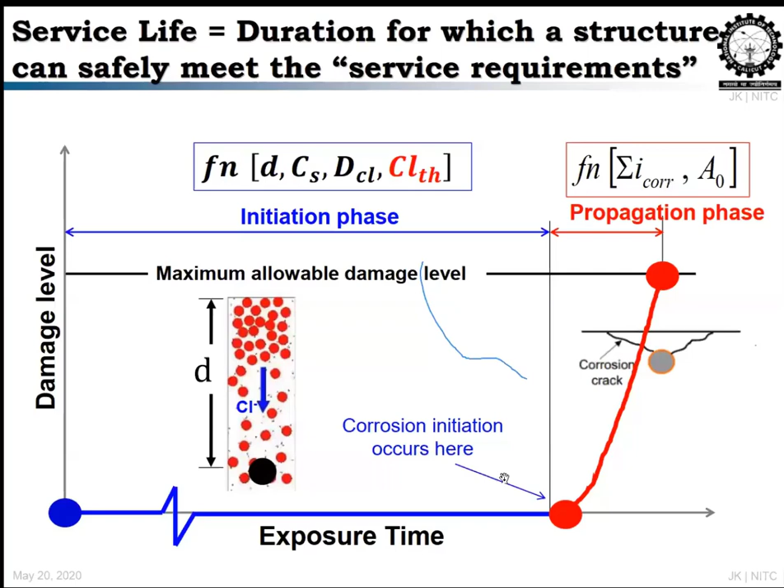For that, I will be showing this software in many places. It is free software which you can download free of cost from life-365.org. With this software, the advantage is you can try different water cement ratios, different inhibitors, different steel, different mix proportions, and different exposure conditions. It is developed by world leading chemical admixture manufacturers, and even ACI is a part of it. It is developed based on standards by ACI, that is ACI 365. So it is a little bit reliable, but not completely a one-point source for everything.

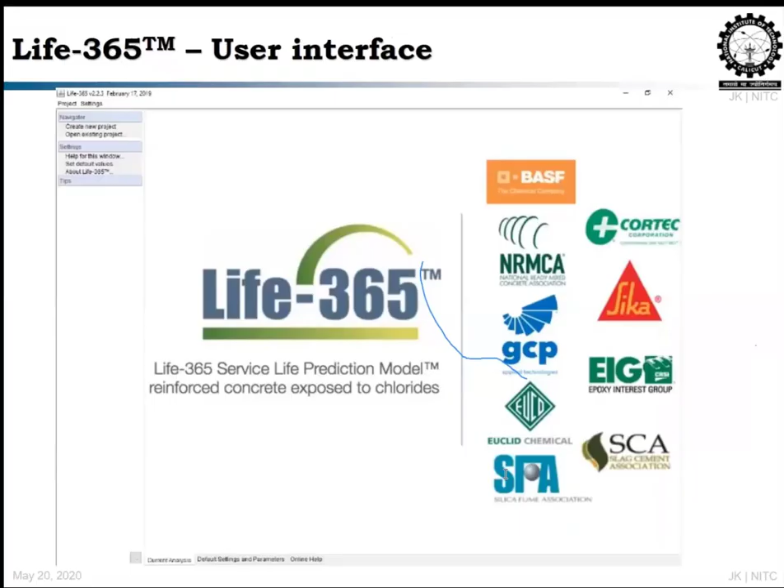So here I'll be walking through the software just by taking a few cases where, for example, a bridge is on a seashore, which has 50 mm cover, with conventional TMT rebar, where the variability is water cement ratio of 0.4 and 0.6. And it has different secondary cementitious materials, 15% silica fume and 15% fly ash, and combinations without it. So these are the combinations. I'll do a quick walkthrough of the software.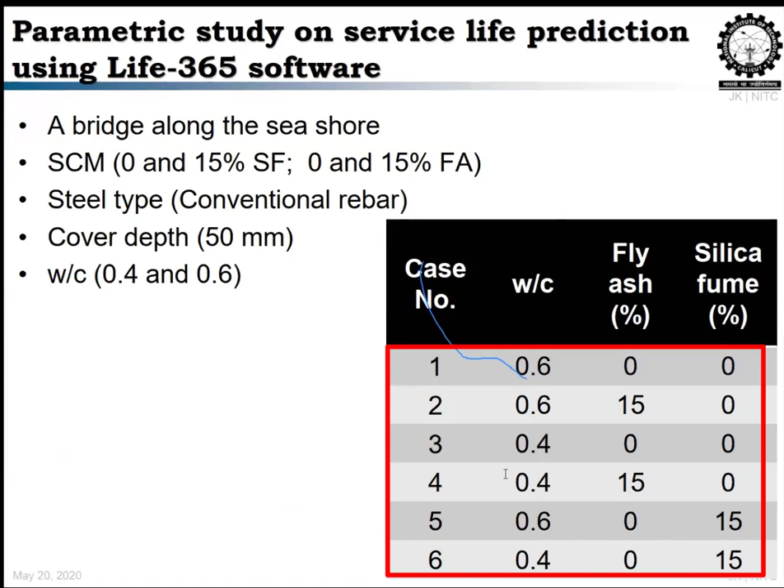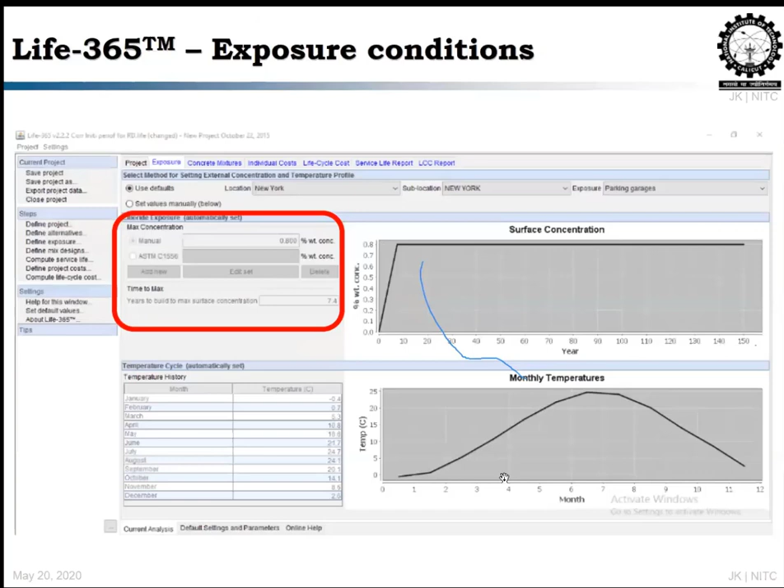The software interface, where you can define the depth of your reinforcement and what type of structure it is. This is more than enough. And where the structure is exposed, what temperature is faced in the particular place, what is the humidity, and what is the expected chloride or other aggressive environment at the place. That will be given, or you can define it for your place. There are only a few certain places, but you can give your own custom temperature, humidity, and your own aggressive environment. And this is the main component where you can define your water cement ratio. For example, the red box shows a water cement ratio of 0.42, and slag used as 25%.

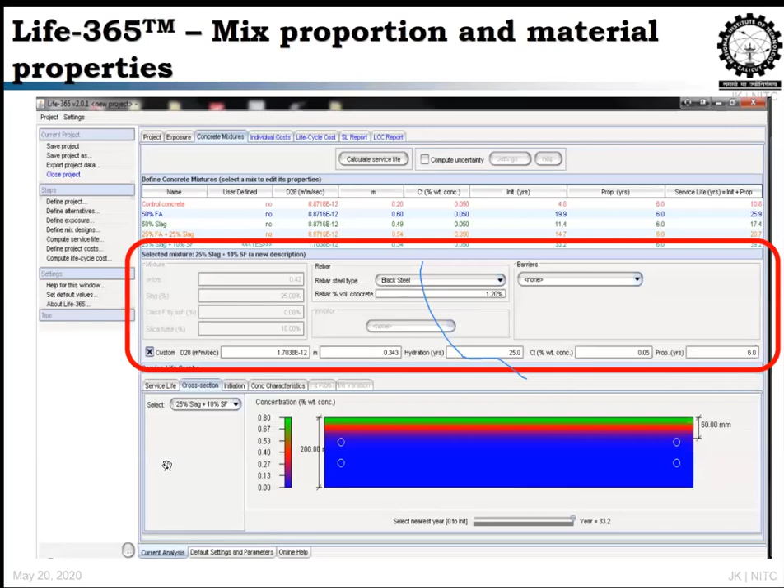It's a screenshot to show. Silica fume is used at 10%, black steel is used, and inhibitor is not used. So these are the parameters for this screenshot. What I'm trying to emphasize is you can give your own situation where the building is going to be constructed, and with that you can find when the corrosion will initiate. That is the major outcome of the software.

So I'll be putting in my inputs, and I'll be telling you how much time it will take for corrosion initiation to happen. If you see the case with a high water cement ratio of 0.6 and no fly ash or silica fume, it is expected to initiate corrosion in 45 years. But case 3, which has only 0.4 water cement ratio and no SCM, gives 61 years, which means about 15 years more before corrosion initiation.

If I take case 2, with 0.6 water cement ratio but 15% fly ash, it gives almost 10 years additional, meaning 54 years to initiate corrosion. Again, if I go for 0.4 and 15% fly ash, it is 81. Compared to 45 years, it is 81 years.

If you take the situation where you are using silica fume instead of fly ash at 15%, which is very high, with water cement ratios of 0.6 and 0.4, it is 103 and 180, which is nowhere comparable with your 45 years. It means you can double or prolong your service life, that is for sure. So don't think that the use of SCM is only to save money or use the waste. It is really there to support you to enhance durability.

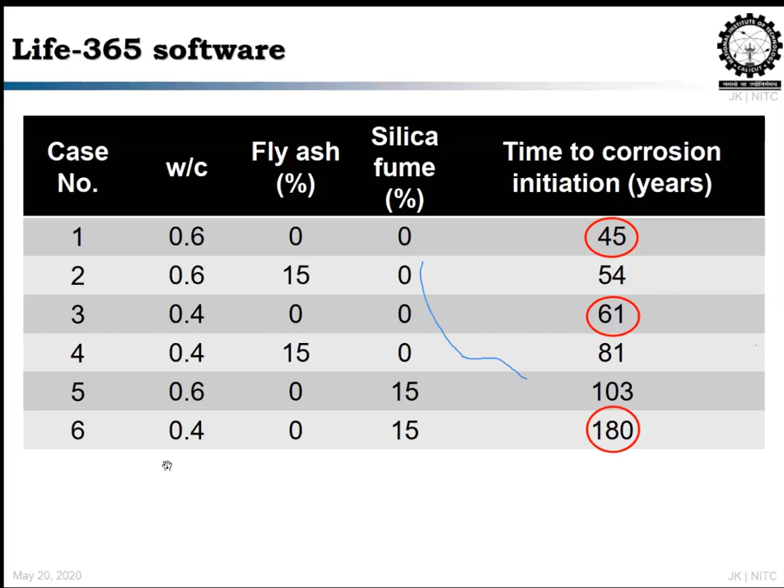So here is a comparison. For example, if I'm using OPC and PPC, and a corrosion inhibitor at different dosages, you can see how much time it takes. I tried with the same software, and I'm showing you data I got from field experience. Here you can see the time required for corrosion initiation. For example, without any inhibitor, OPC is expected to have corrosion initiation at 45. But if you are using PPC, this is very, very important.

You don't use any inhibitors or anything, just PPC with 15%. You can see the service life increases to almost 90. So that is the major takeaway. Here the water cement ratio is 0.4.

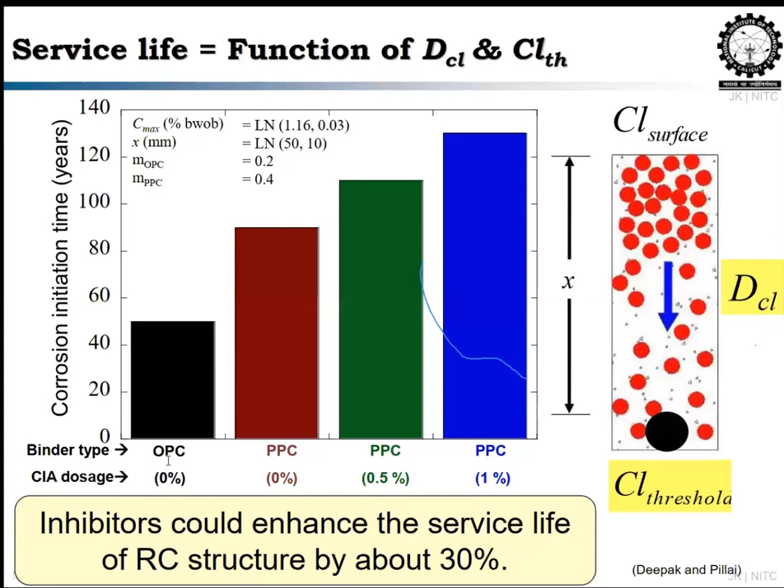And if you are using corrosion inhibitors to further increase your service life, with 0.5 and 1% dosage, you can see it goes beyond 120 if you go for 1%. So you can increase your service life by 30 years by changing the case a little bit, which is going to cost you a little in the beginning. That is the very important thing.

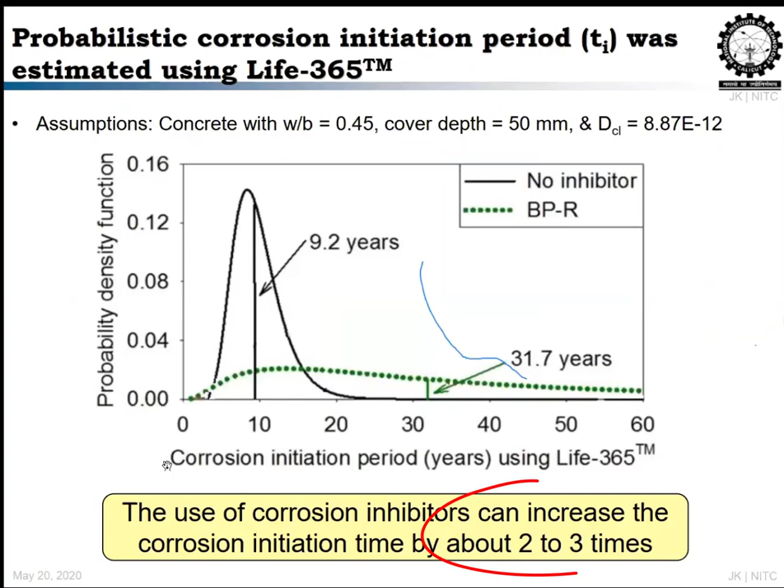And if I'm not using any PPC, just only the inhibitors with OPC concrete, concrete expected to corrode in 9.2 years, with a bipolar inhibitor, is going to corrode in 32 years. That means almost 3 times the service life, increased because of the use of the corrosion inhibitor.

Like 32, so 1.5 times. So on site we should always ensure that adequate cover is provided. That is extremely important. For that, we usually recommend going for cover blocks rather than putting waste bricks.

Why? Because waste bricks will crumble into pieces while we are moving the trolley and while we are walking, because of the friction created by the jerk during the movement. Many plastic cover blocks are also available, but in that case they won't have proper bonding with the existing concrete. So it's always better to have a concrete with similar strength and transport properties to the concrete you are making. It's better to make a cover block with the same concrete.

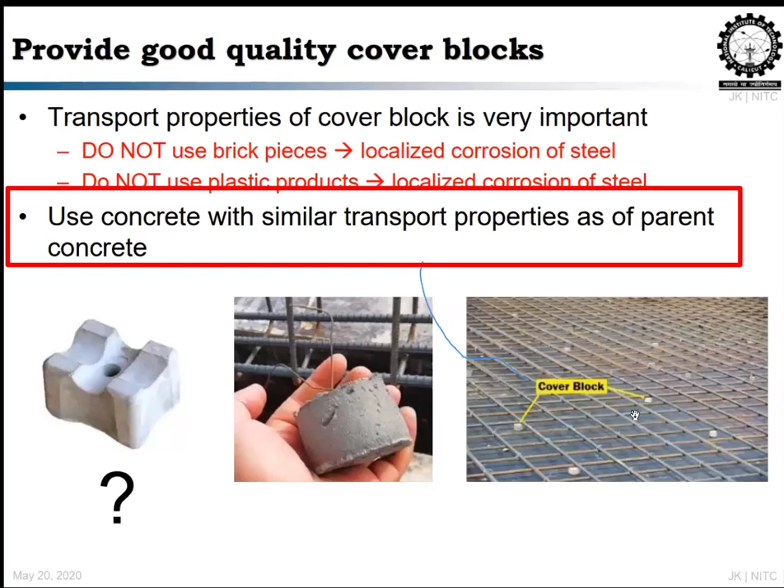And if you are a builder, it's better to put a specification rule where you will be checking the cover depth, and based on the variation or integrity in the cover depth, you will be imposing a penalty, so that whoever the builder is, they will ensure they maintain proper cover. Why? Because you don't want to use any SCM, you don't want to play with the water-cement ratio, you don't want to use a corrosion inhibitor. Just by making use of quality control in getting the cover depth, you will get very good quality concrete and a highly durable structure.

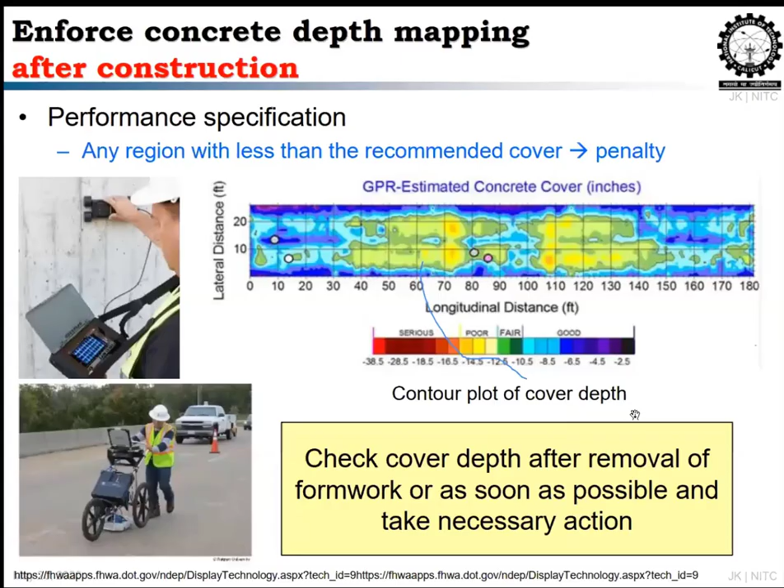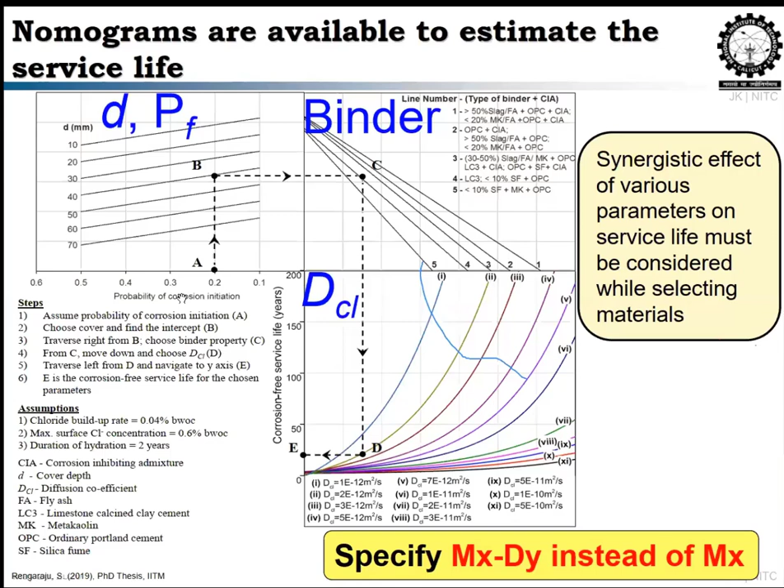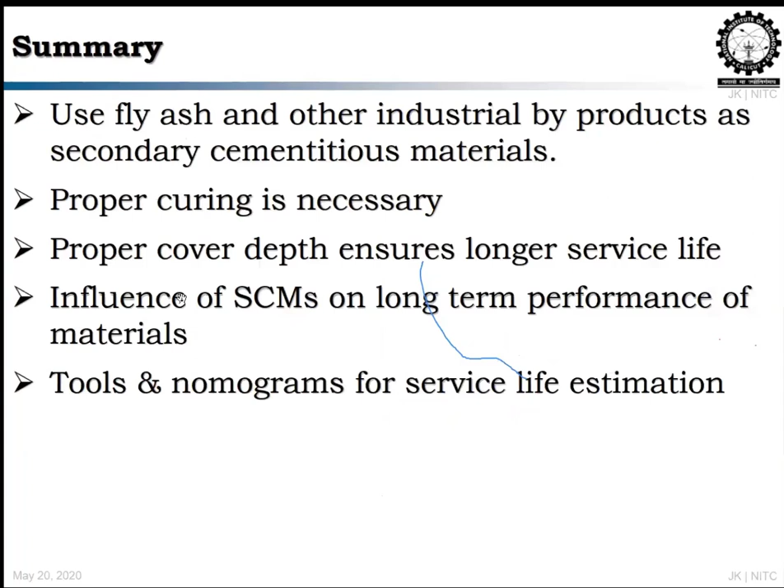So the summary of today's presentation is: we have to use fly ash and other industrial byproducts as secondary cementitious materials, which give you very durable structures, and proper curing and giving proper cover depth is very important to ensure service life. The influence of SCMs, not only on strength but also long-term performance, is very clear from studies done throughout the world.

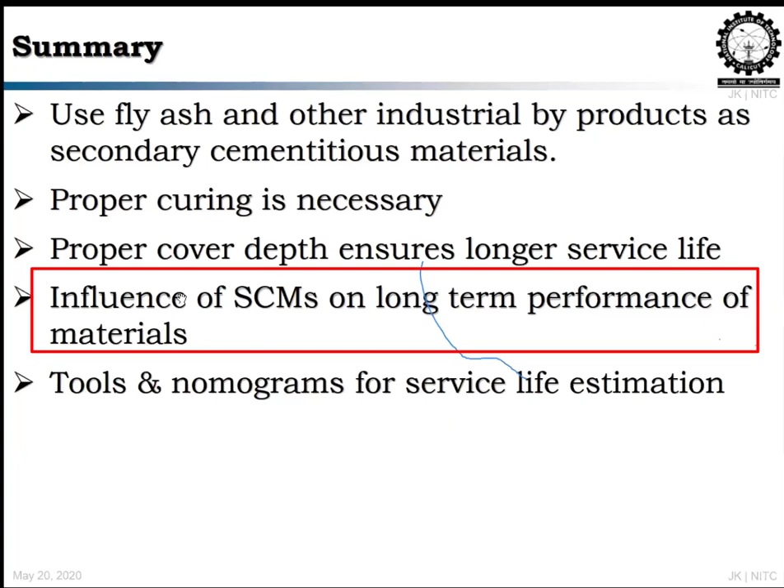It is proven, and now we have learned about some tools available, and field engineers can think of going for this type of nomographs, which will be useful for defining the service life of a structure.